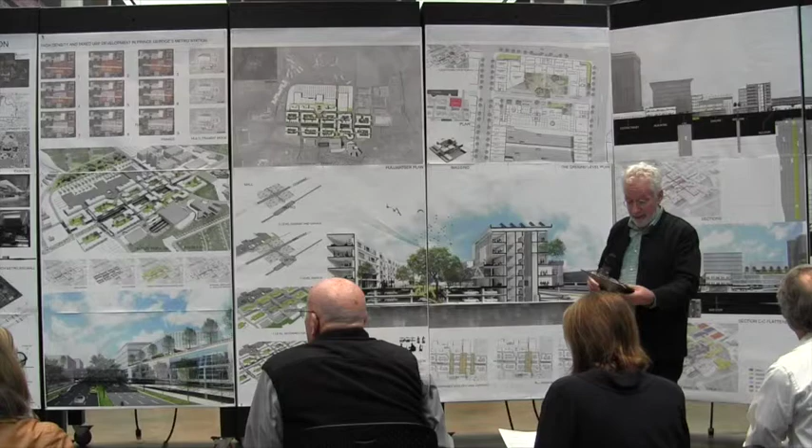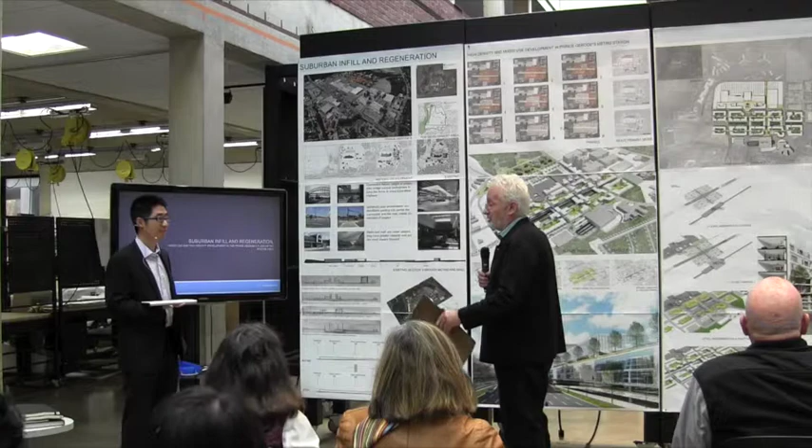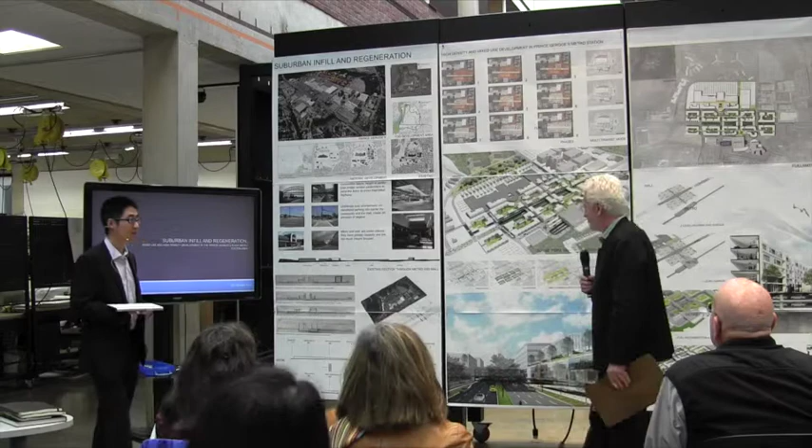Qiansen is a Chinese national who's joined us for the last several years, and I've had the pleasure of really having Qiansen as a student in the past, and he's actually assisted us in the office. He's got really a brilliant hand and mind, and he, however, chose a thesis subject which surprised me at first. You actually started in China.

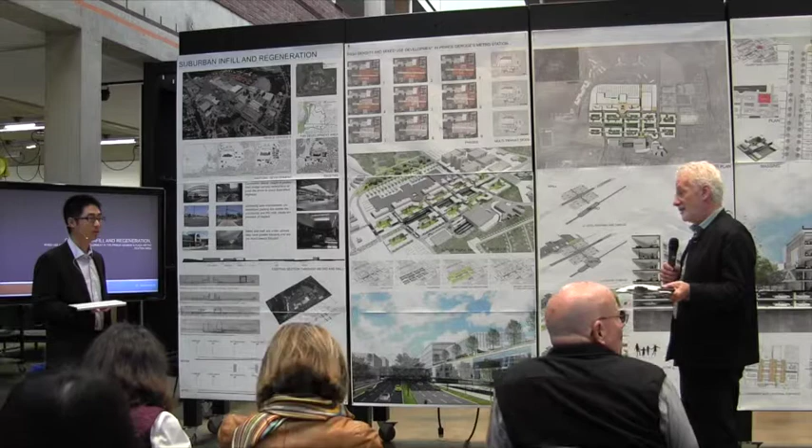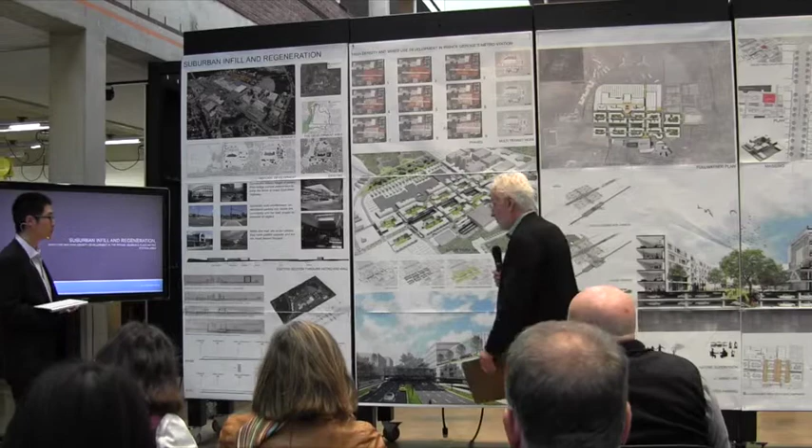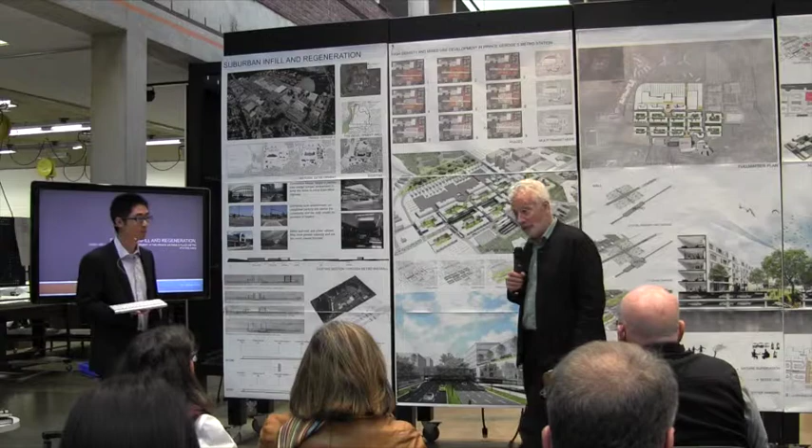Yes. And he was going to do work on second-tier cities, as I recall, to try to look at giving them more attention, more prominence, more appeal, etc. And instead shifted to an American context, especially suburban context, making a case to me, which was pretty fascinating, that China's rapid growth and transformation was probably going to be facing the same fate that American suburbs faced, which is somehow that rapid growth, perhaps not the deepest thought, maybe more impulse and space-expansive development.

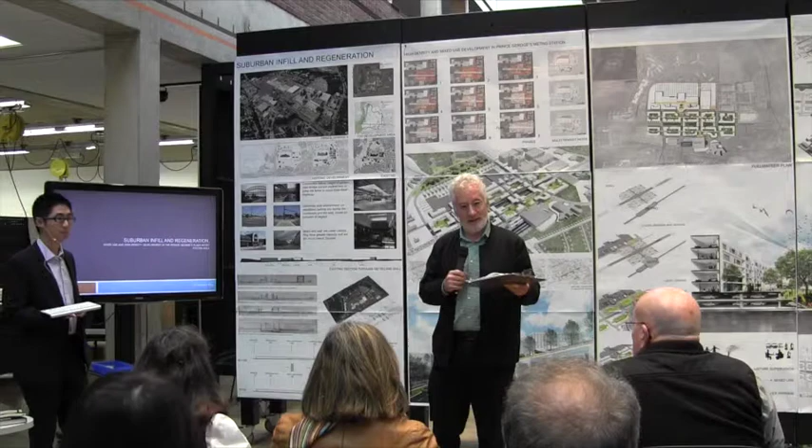And since American urbanism was looking at the suburban settings and thinking about them ahead of some of their Chinese brethren, he wanted to look at that and look at the transformation possible here in America as a way to set the stage for his thesis. So with that, Qiansen.

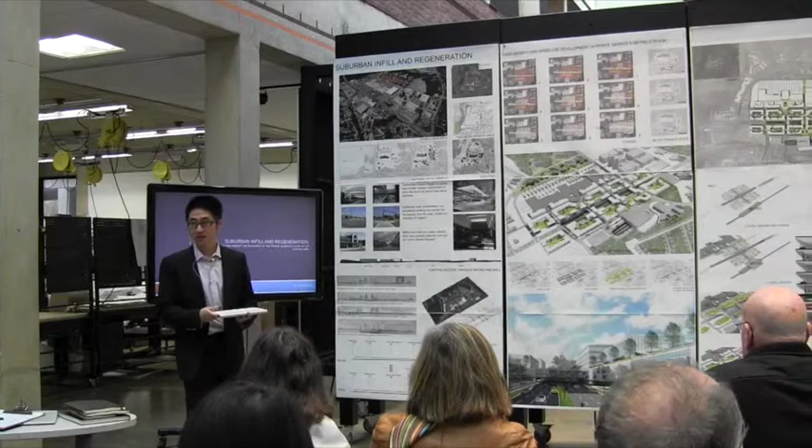My thesis title is Suburban Infill and Regeneration, High Density and Mixed-Use Development in Prince George's Metro Station area. So why am I doing this thesis? As Gus mentioned, the Chinese city is in rapid growth and expansion. So I think it's very important.

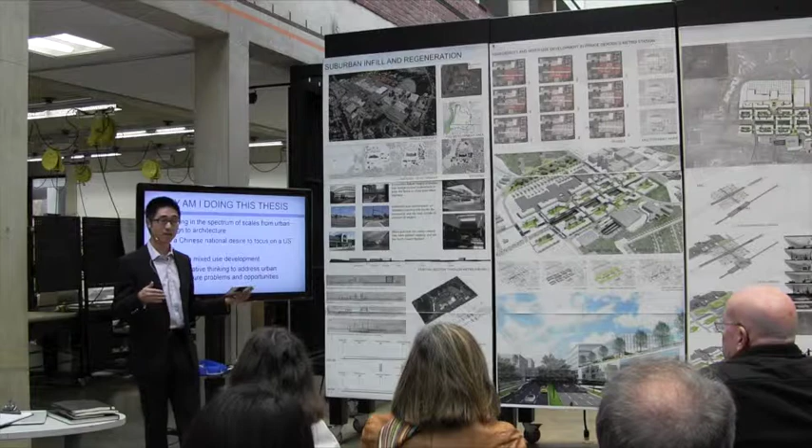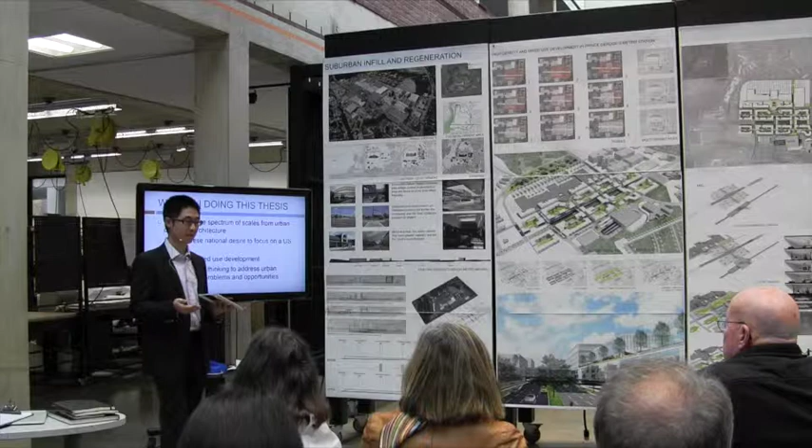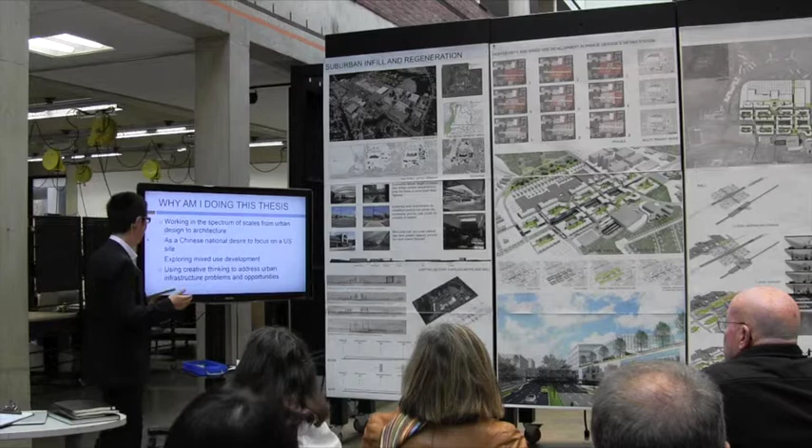It's very important for me to work in the spectrum of scales from the urban design scale to the architecture scale. And I plan my career as an architect in the United States, so I'm thinking that choosing a site locally might benefit myself. And I'm very interested in mixed-use development and how to use creative thinking to address urban infrastructure problems and opportunities.

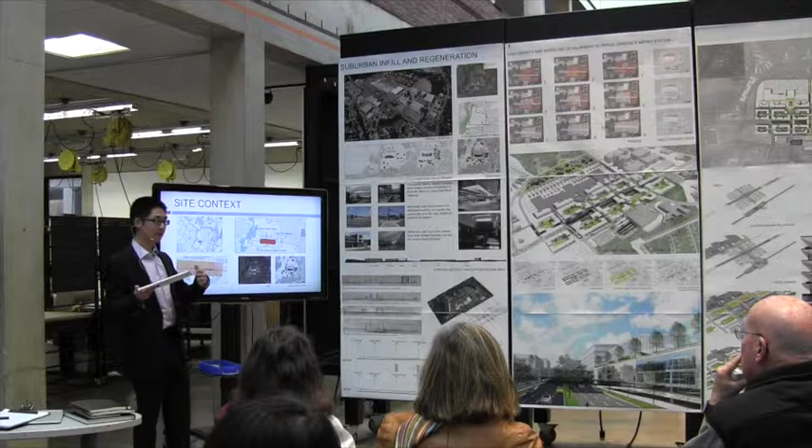So my site context. My site is located 3 miles away from the University of Maryland. It has shuttles connecting directly from the site to the campus, and a lot of bus routes going through my site, so it has potential for further development. And inside my site there are a lot of educational institution buildings: a high school, a community college, an elementary school. So it's very important to consider a safe environment for the pedestrian.

Talking about the pedestrian experience, the primary connection for the pedestrian from the mall to the metro station is a pedestrian bridge. This configuration diagram shows the suburban and urban configuration inside my site. So, potential for the new development.

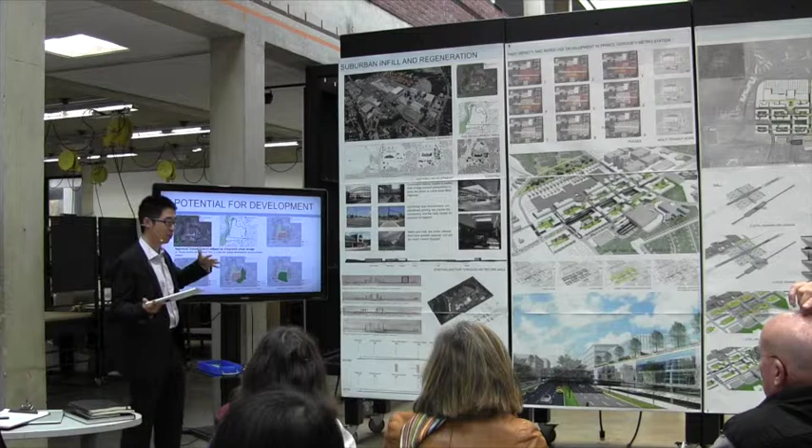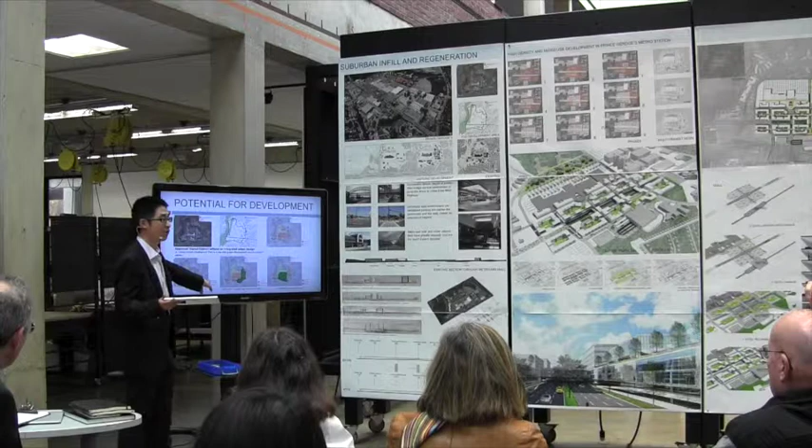The black boundaries show the transit-oriented development approved by the government, which is not an integrated urban plan design. You can see the red zone implies the suburban characters, and the green zone implies the more urban characters in progress. And this is the scope for my intervention. The reason is that I think it's appropriate to connect the existing mixed-use development of the University Town Center back to the metro station, and also connect the successful mall to the metro station.

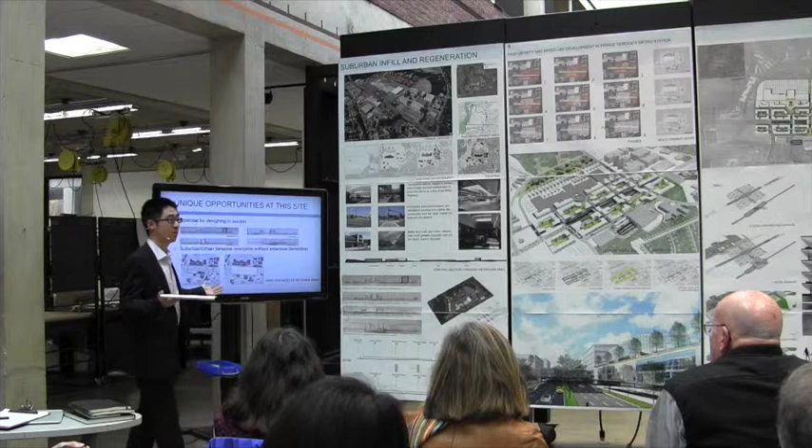And the unique opportunities inside my site. The first one is the potential for designing in section, because the East-West Highway works as a barrier, and pedestrians use the bridge for the overpass. So there are a lot more opportunities to further develop strategies in the section. And the suburban and urban tension I mentioned before can be overcome without extensive demolition. You can see for my scope of intervention, I only need to take 7 single-use buildings away for the new development.

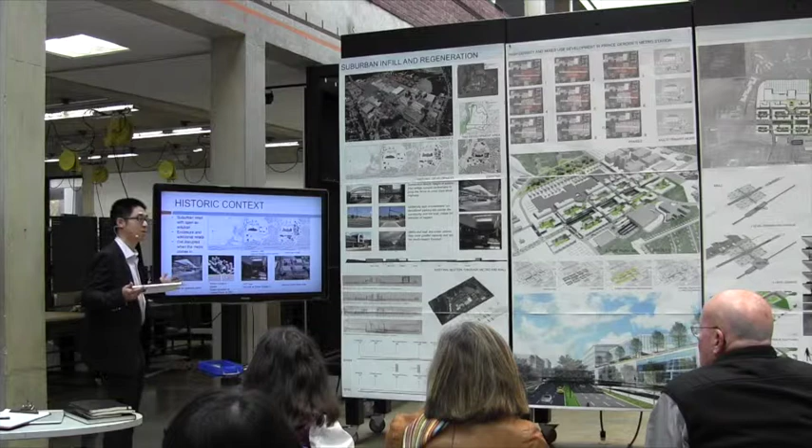Before I further share my design, I want to explain what happens here. The first thing is the figure-ground diagram showing the 1940s, 1980s, and now. The mall was there since 1959, and it used to be an open-air mall. Since additional retail came in, the mall became enclosed. Edward Stone proposed a vision for new urbanism using office buildings and high-rise towers here, but only building A and building B, known as Metro 1 and Metro 2, were built. And they use the rest of the space for parking. So when you look at this historical context, you can see this place has been struggling with the suburban and urban environment all the time.

So I will address 3 key issues in my site. The first one is connection failure, the pedestrian overpass. Some people even climb over the fence to cross the East-West Highway, and the government is trying to increase the height of the fence. It's very dangerous. And the pedestrian bridge is underutilized, uninviting, and in disrepair. I can smell somebody peeing inside that bridge. So it's very unpleasant.

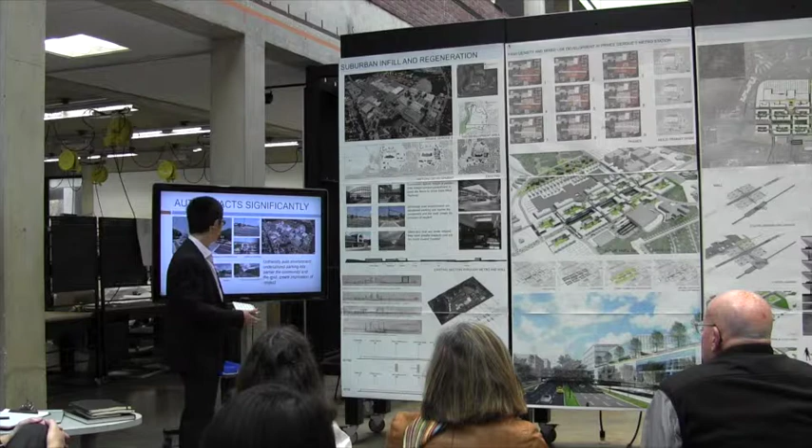It also impacts my site significantly. You can see the formless intersection, and it's very dangerous for people to cross. And underutilized parking space works as a barrier from the communities to the mall. And the big destination is too inward focused. You can see that the mall only serves inward, and the metro station is hiding behind the parking garage here. And this is the entrance for the metro station.

So I'm searching for mixed-use and high-density development to help me repair this fragmented context. So I start with how I can do some intervention with the mall, with the metro station, with the frontage of the East-West Highway with higher density, and something with the intersection and node strategies. So I did some precedent studies to give me more insight for my thesis.

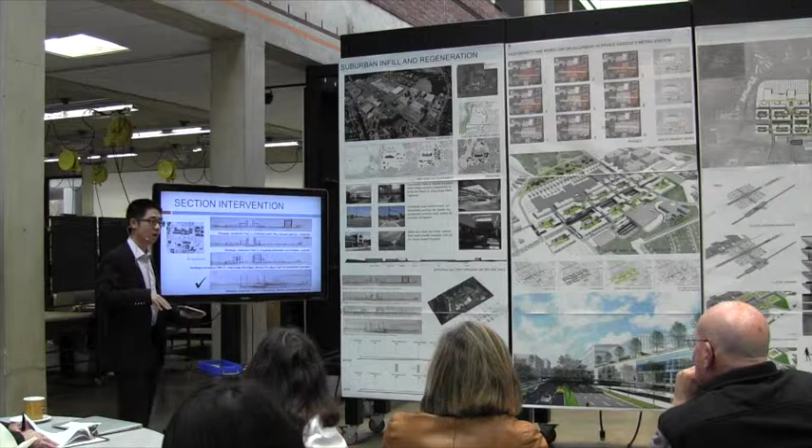For the section intervention, I propose 4 different kinds. The first one is to change one segment of the East-West Highway to a boulevard, compress the traffic, and make cars and pedestrians share this road. The second strategy is using a sunken plaza to make people go underneath the highway, which has proved ineffective because it's dark and people prefer grade level. The third one is to use bridge architecture to make better connections, incorporating the existing infrastructure. And the last one is depressing the highway and making the cars go underneath the pedestrian grade level.

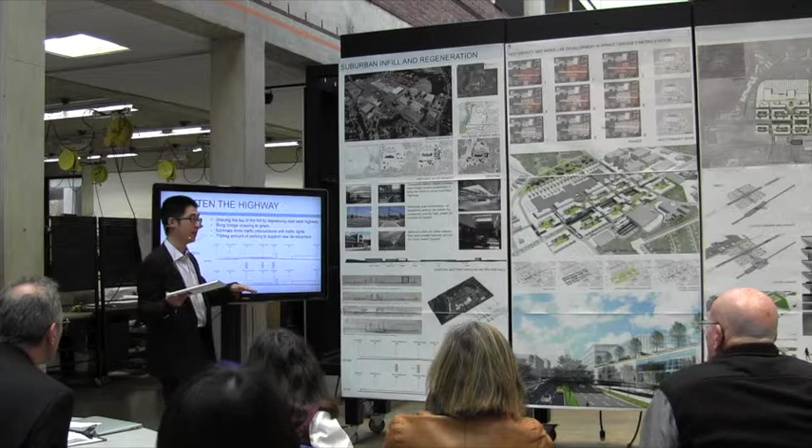The reason why I'm choosing the last one is that it gives much more freedom to pedestrians, and it will add value to the properties of the site. Another reason is the special topo conditions. This section shows the East-West Highway, and you can see that the pedestrian bridge is much higher than the rest of the road, about 40 feet higher than Adelphi Road. By depressing the highway, making it go underneath the pedestrian connections, you can make this road much flatter and give a better experience for the drivers.

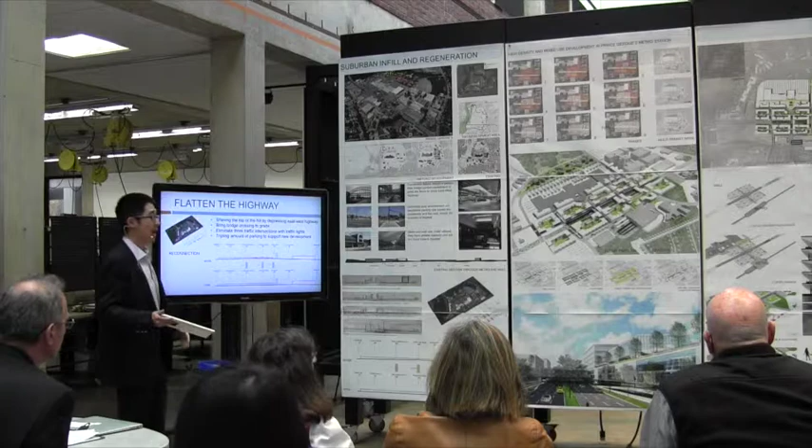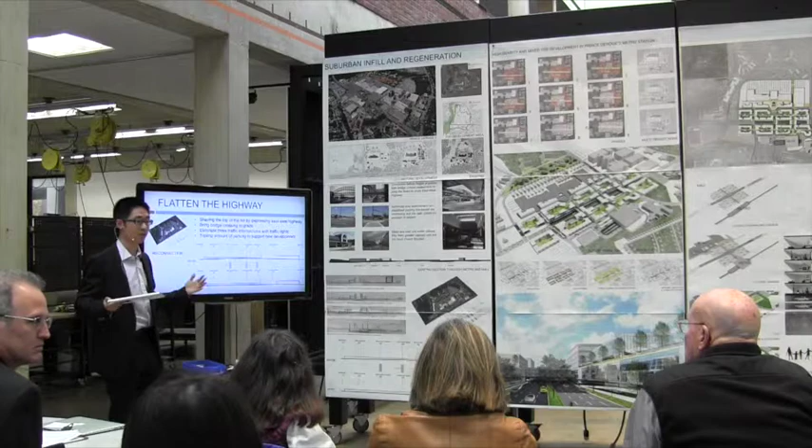And how I can make this happen? I have 4 steps. The first one will be shave the top of the hill by depressing the highway, and then I will drop the bridge down to the ground and eliminate the 3 intersections and make new connections. And since I dropped the highway 18 feet down to the ground, lower than the lower, I can have at least the opportunity to construct at least 2 levels of the parking ramp underneath it.

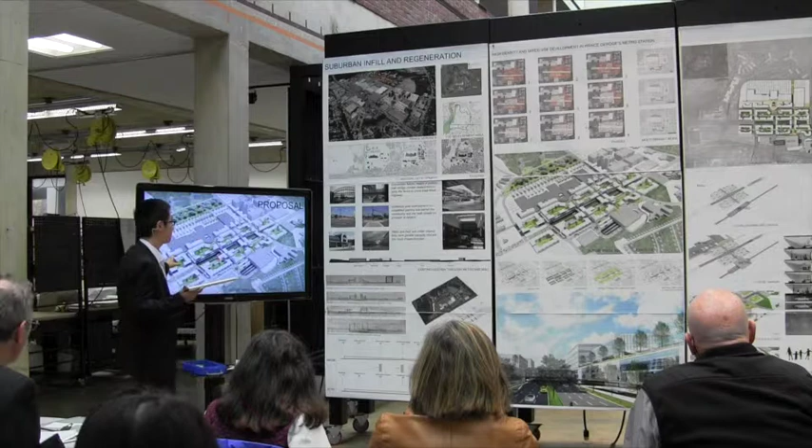So this is the existing condition. You can see the east-west highway, the pedestrian bridge, the metro station, the mall. And this is what my proposal looks like. So you can see depressing the highway remakes the new connection, gives the opportunities for much more freedom of the pedestrian. And by using these courtyard types of plots, creating some more private space.

And you can see these new connections. The middle one will be much more friendly, but also can be shared with some bus and bike lanes. And these 2 new connections could be a little bit of car and pedestrian sharing. And this new development also can give opportunities for further development of this mall here.

So these are 4 big principles in my urban design. The first one is the transformation of the infrastructure, the circulation diagram. The second one is courtyards, courtyards with green vegetation and playground. And the third one is a street connected architecture. So it means that wherever you construct your buildings here, you can have multiple exits for different transit modes. And natural ventilated landscape parking. So I'm going to go into detail to tell how this is going to happen.

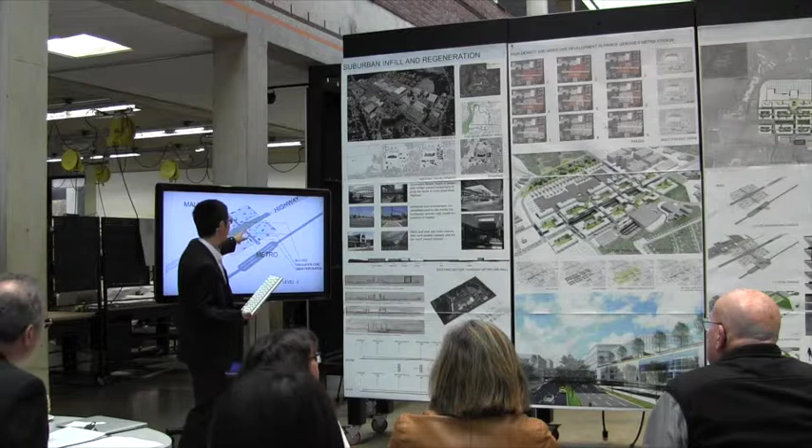So since the highway is depressed and is connected directly back to the minus 2 levels of parking ramps, with the bus stops and the circulation cores to bring people going upstairs, and with the green perforations coming here. And the minus 1 level. And at the ground level, you can see the new connections with mixed use, with office buildings facing the noisy highway, with the pubs, the restaurants, with cafes wrapping the new bridge to prevent the pedestrian being exposed to the highway. And this is a mapping diagram to show that.

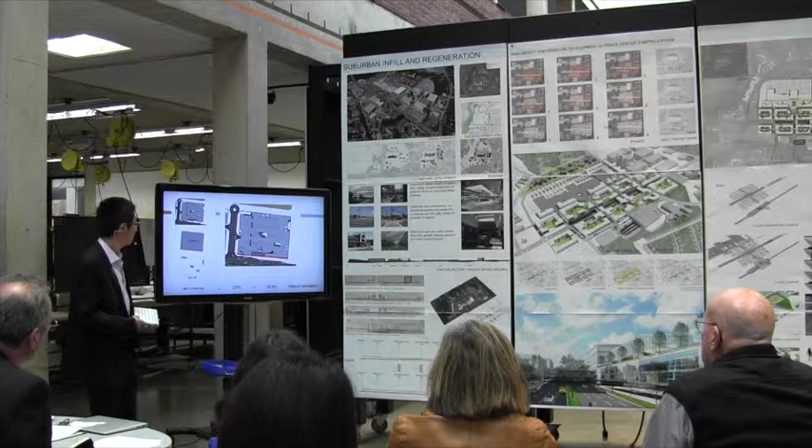Sorry, just, are these new buildings? Yes, these are new buildings. So they're inserted within the mall? Yes, they are upstairs. They're on the edge of the mall. But you're changing the mall, or tearing it down and adding them? A little bit of both. Okay, got it.

So I did some calculation to prove that my parking ramp is effective. By doing this green perforation, it gives me at least 6% of the natural ventilation, and plus this side of the parking ramp opens totally up to the east-west highway. So it gives me at least 25% of the natural ventilation. So in total, I can get at least 30% of the natural ventilation, which will make this parking ramp very inexpensive and effective.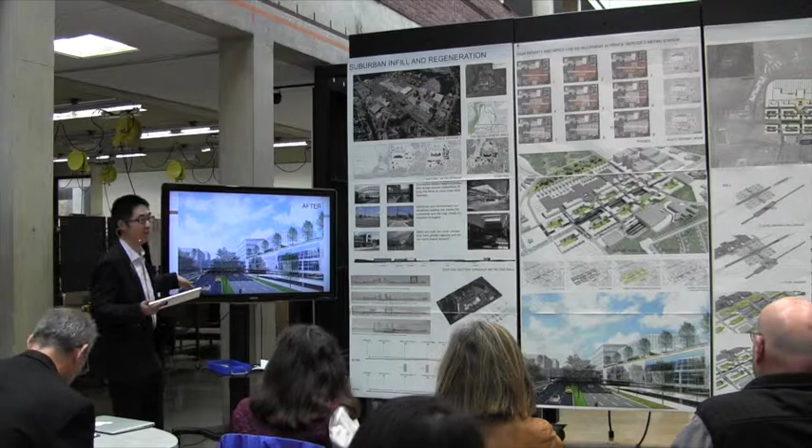So this is the existing condition of the east-west highway and the fence, the overpass, and you can see the gas station placed here, and a lot of cars and pedestrians going here. This diagram is my proposal. You can tell from this image that the depressed highway is not offensive like a tunnel, but it has plenty of vegetation and daylight and natural ventilation and multiple transit modes going on here, with bus stops, with a new bridge working as a shelter for the people waiting for their bus.

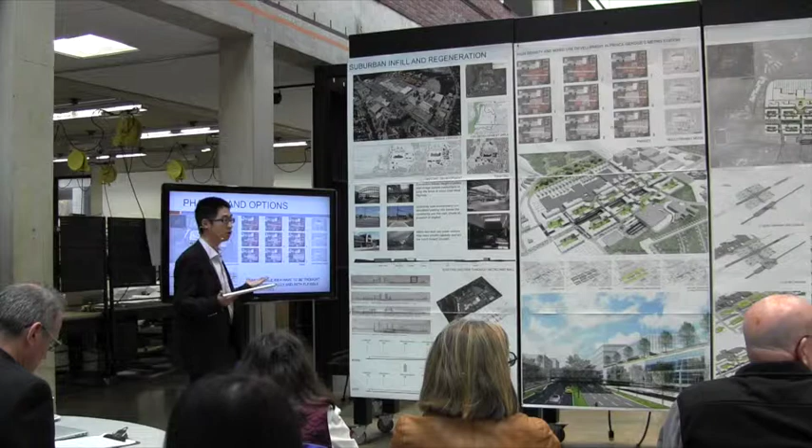So urban design ideas need to be developed incrementally with flexible alternatives. So I'm thinking of my development as phases. The first and second phases will be the infrastructure transformation, and in the third one I'm starting to program my architecture, the courtyards, with at least 500 parking spaces serving the upstairs programs inside a 120,000 square foot development.

And this is a diagram to show the mixed use inside my area. So you can see this is before. This new development creates some kind of residential communities, with the office buildings facing the highway and the residential buildings held back because it's more private, and some retail, pubs and daycares, the mixed use programs working as connection programs going from the metro station to the mall.

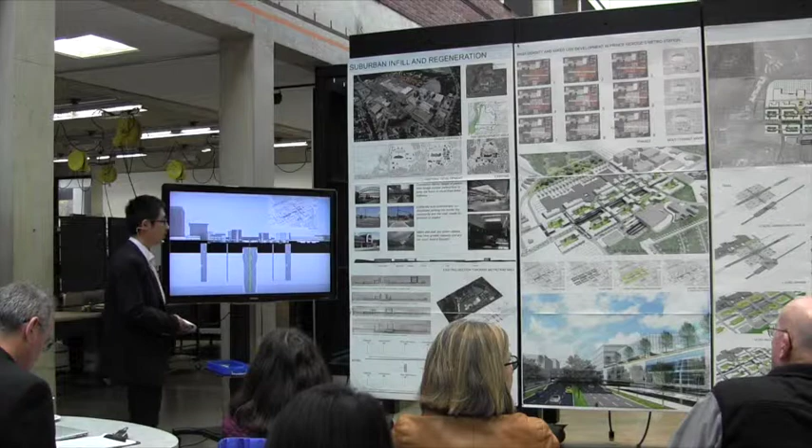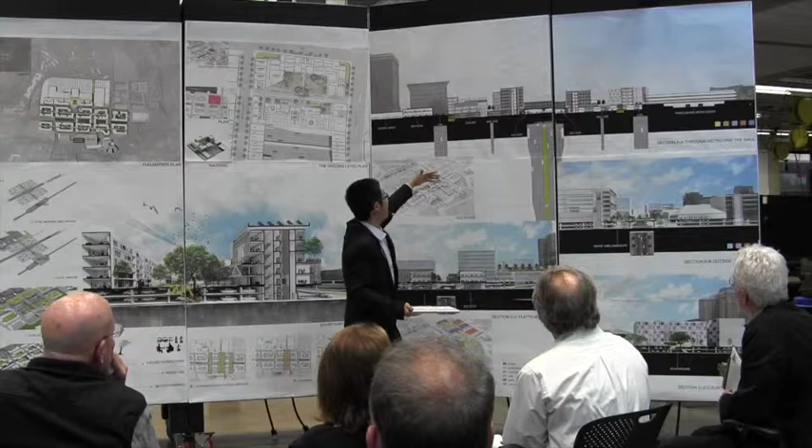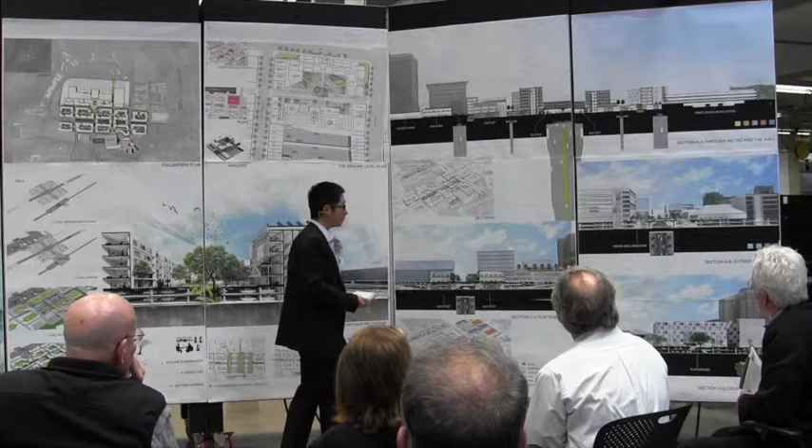So I'm going to bring you guys through my board. So this big section shows that the primary pedestrian activities happen at the ground level. You can see from the metro station and the courtyard and some cafe and office building and the daycare center, and it gives opportunities for bike lanes and cars, and also gives opportunities for the new retails for the mall.

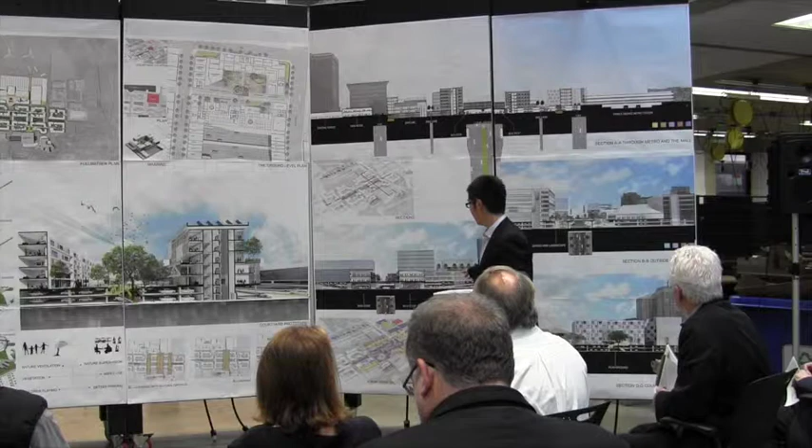And we're stepping outside the metro station. What you face is, instead of the dark tunnel, a pedestrian plaza with all the retails, with a gym, with a cafe, and you can pick up your cars going underground. And when you're going a little bit forward, you can see this depressed highway and the bus stop and the restaurant and the Target in front, and also the green roof.

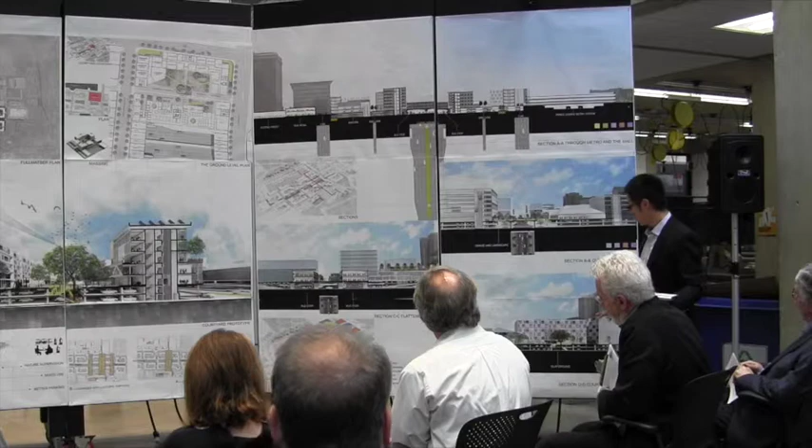And then we go to the courtyard experience. You experience a private environment with a daycare center where parents can drop their kids, and they can go shopping either this way and go to work either this way, with a playground with green recreation here.

So this is the architecture scale of my thesis. The big idea is that my architecture serves people both inward and outward. So the programs of the bike shop and retail serve outward, and the gym and cafe serve inward, with the bike storage and bike lanes with a children's playground and green recreation.

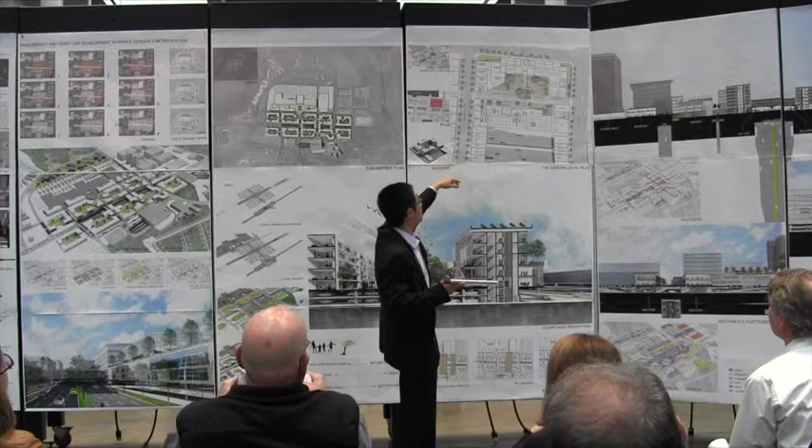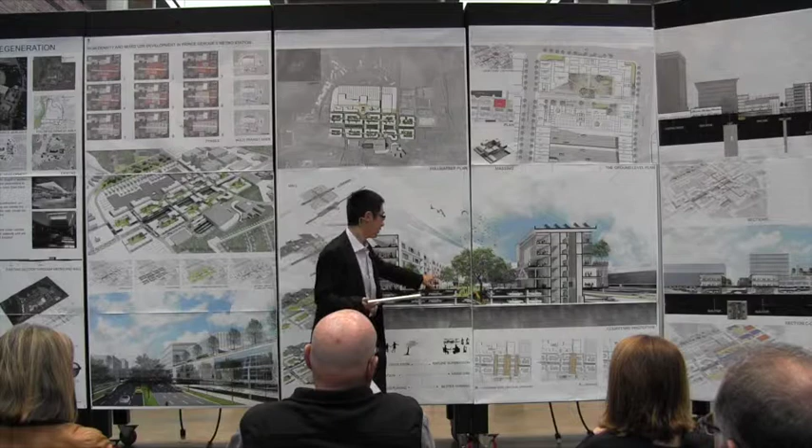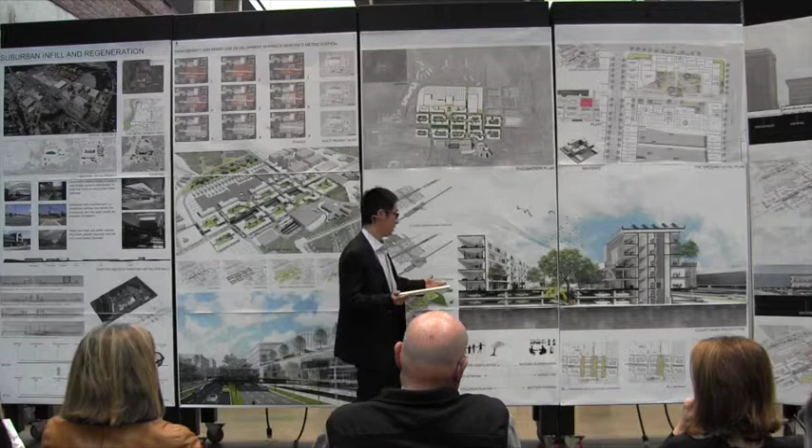So this is an experience that you can have inside my courtyard. One of the unusual ideas of my urban design is preparing the below-grade parking ramps using a series of landscapes for children's recreation activities. You can see my ground is 2 levels above the highway, and unlike other city parking ramps, my ramps give people better natural ventilation, air, and sunlight, and a lot more activities inside my site.

Usually the parking ramp is the worst experience in a project, but in my project it could be the most pleasant experience on the whole site. So that's all about my thesis.

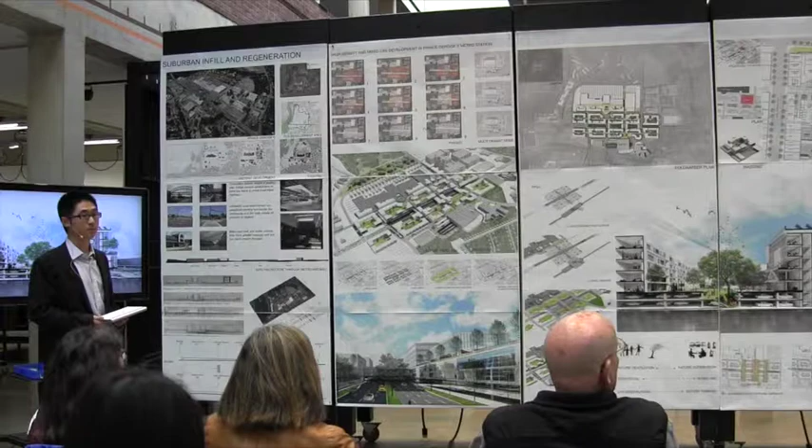Question. You haven't changed the level of Belcrest Road, right? No, Belcrest Road stays where it is. Right? Just point to Belcrest Road so everybody knows what I'm talking about. Yeah, it's that road, which is the main spine through there. And the reason you have 2 bridges is because on the left side of the plan, you didn't bridge that because you have to bring the highway back up to grade there?

No, that's not the reason. The reason is that I'm giving the options that you can wrap it, or you can leave it open. This perspective view is only one option; if you find this successful, you can wrap it here. So the ramping starts east of Belcrest Road, right? Yeah. And then goes under Belcrest and stays down all the way to here, and it meets grade there, right? Yeah. Okay, that's all I wanted to make.

So I'll start with just a response. It's an incredibly ambitious project that tries to solve many problems, right? You have traffic problems, environmental problems, economic problems, quality of space and quality of life problems, and you're trying to address all of them in a place that's been rather poorly loved for the last 50 years as the result of not very thoughtful investments. What is the most important thing to you? What would be the criteria for success? What are you trying to do with this intervention, first and foremost?

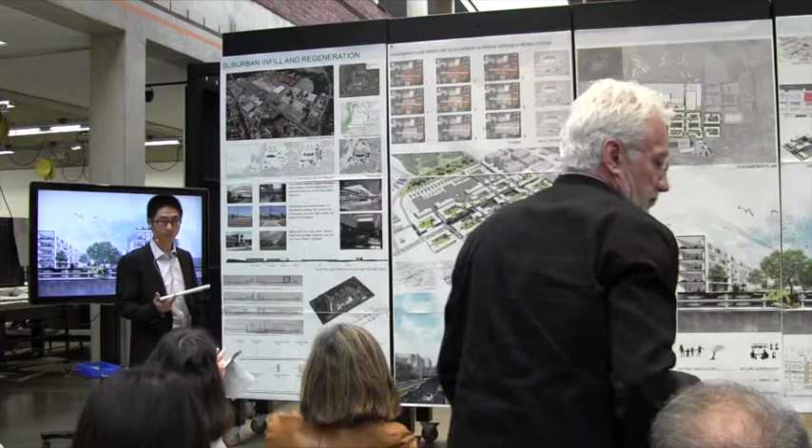And it's also the connection to the metro, right? Yeah. I mean, this metro is this underutilized asset in the community, and by creating all this development on this side of the highway, well, not quite exponentially, but you're dramatically increasing the opportunity for people to live here, to work here, and then connect to all the other places that they can connect to by metro.

You're creating a sense of place here. There is no there right now. Right? Well, there's a start. University Town Center is a really good start, but you're trying to increase that dramatically. I think it is a heck of a problem to take on in terms of scale, and I want to tag on and commend you for that.

I have a couple of questions. How many residential units are you adding in this? You know, how many apartments or condos, how many people could live here in addition to work here and shop here? Hundreds, or did you quantify it? I'm sorry, I didn't quantify that.

Okay. Because I think that's key to bringing this to life, obviously, and I was just looking at how you distributed your residential components. I think you've done a good job of balancing the residential alongside the office and the retail. What were your thoughts about, is this happening all at one time? Is this happening in phases?

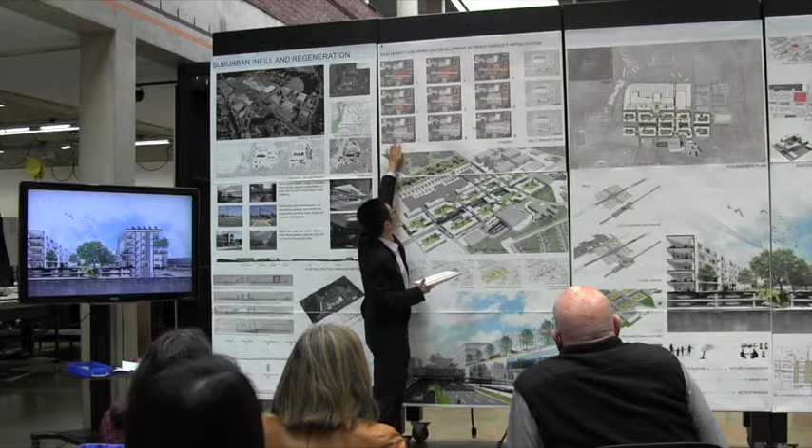It's happening in phases, as I mentioned before. So this is a sequence of my phases. The first phase will be the corner, because the corner usually has the highest value. And then the second phase will be happening in front of the mall. After these two happen, you can either demolish the stuff in front of the metro station, or go that way to redevelop that single-use development building. And each phase the program has 120,000 square feet, with 500 parking spaces to serve it.

Yeah. I want to just echo what has been said, that this is a very ambitious undertaking. A couple of observations about what's going on right now. There are a number of places throughout the United States, and certainly several in Washington, where the communities are doing makeovers of existing locations of infrastructure. This makes me think about what's happening in Tysons in Virginia. I don't know if you know about that. A place that was conceived in the 1960s that's totally automobile dependent, and they're talking about a retrofit that will take 20 or 30 years and require essentially creating a whole new pattern of streets and blocks.

Capitol Crossing over the 395 depressed segment of highway in Washington. I don't know if you know about that. They're going to deck it over and build new things. I think what you've done is an exploration that speaks to a lot of what's happening in reality, not just here and perhaps eventually in China. Although I was just recently in China, and they're operating at a different scale. I was in Shanghai. They're building 7 subway lines all at once.

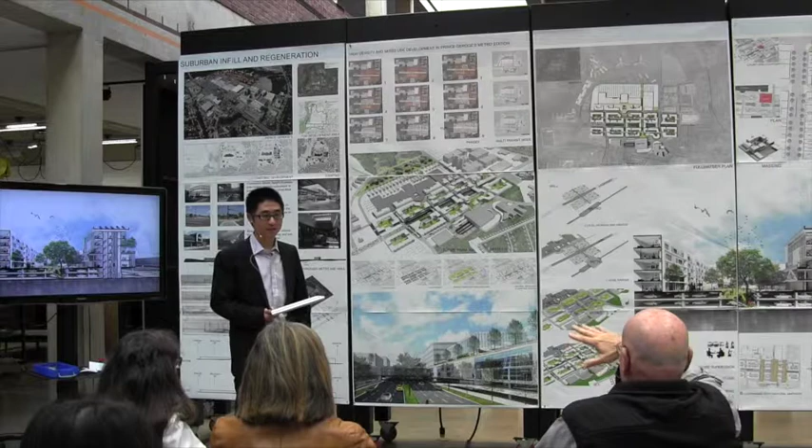Big buildings out there, I mean, there's... Oh, yeah, no, I know. I'm just curious. It's really not a criticism, I think it's a question that this poses, which is, should the density at the east end and the west end be, as you show, the same? Should it be higher at one end than the other?

What should the components... Should the building blocks be similar thicknesses also? Your building blocks are almost 60 feet. Yeah, but they're similar thicknesses. And I can imagine that's for perhaps daylighting and solar strategies and things like that. But some of those thicknesses might actually vary depending on the use inside of it. Residential might be different than office, and it might be different again than a retail component.

In your new construction, can an anchor store come in? I know there's anchor stores already at the mall, but if a new retail establishment wanted to come in and be in the newer part of the development, I'm not seeing a place for that really to be absorbed. But I think these are good problems to have. It's exciting, and the blocks are similar in scale. I mean, I'm surprised to see there's not a little variety.

At one level, it's a bit of an updating of a similar strategy for Grand Central, which is you put the transit at a lower level and you build a deck over top of it, right? And that's what they did at Grand Central to make all the real estate value at Park Avenue, all those areas north of Grand Central.

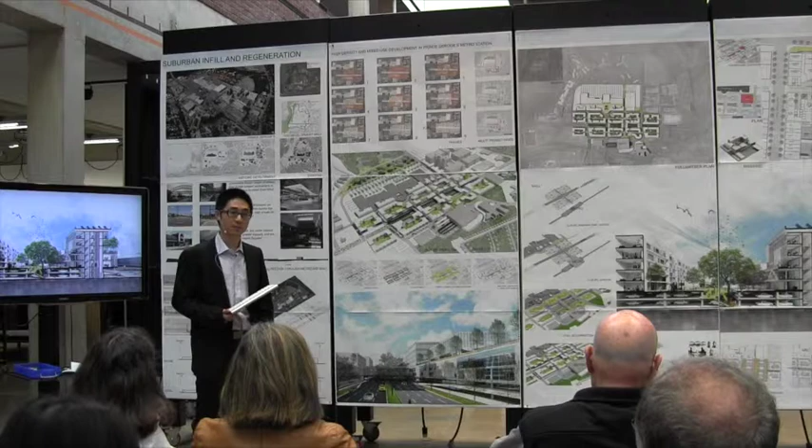I guess a couple of questions come to my mind about that in terms of your strategy, which is, if you have to accept the premise that East-West Highway in this location is never going to be a pedestrian street. And the current master plan for that area calls for trying to transform it into a pedestrian street. And you've taken the opposite point of view, which is to deck over and to say it's going to be a kind of throughway and not a surface street that really could be inhabited. And I think that's an okay proposition to take.

I think the thing I would be looking for more in the research is, were you to try to make it a pedestrian street, did you look at what you would have to do to it? For example, is there 40,000 cars a day or 50 or 60? And at what point does that become untenable? Because traffic engineers will tell you above 40, it's really hard to have a pedestrian environment, even though there are boulevards in Paris and Connecticut Avenue in DC that carry that much traffic. So would you have to widen it and have a kind of frontage road or something?

One other point I want to make is that I think the strategy seems fine. I would be looking as well for places where other amenities might occur, like schools, so you could have a complete community, more of a connection to the retail center that doesn't really work right now, the one they built recently where the supermarket is. And then probably even building over the metro itself, so you could get more density, because there's no real reason why you couldn't build over that as well. Yes, exactly.

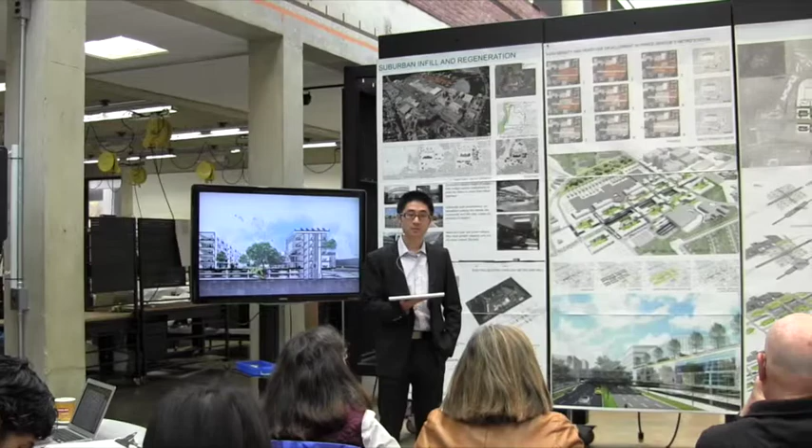Yeah, you can have more of a green plaza over the car area. But I think that's the dilemma of this thesis, which is by making this grid network a couple levels above East-West Highway, you're basically turning East-West Highway into kind of a through thing. I think it's very difficult for it to have a successful pedestrian environment.

And I would almost think you'd go in the opposite direction, which would be to say, hey, screw it, we're going to put this deck over the top of this. It's going to be very different with very high density. Outside of Stockholm, yeah, it's a tunnel with a much larger deck, and you put 10-, 20-story buildings on top of it. Or even park space at the level he's putting it. I think we're both arguing for the same thing, more deck and less just little bridges going across.

Is there a response to some of these points? No, I'm just learning, listening. I just want to be sure. It's been a while since we heard from you.

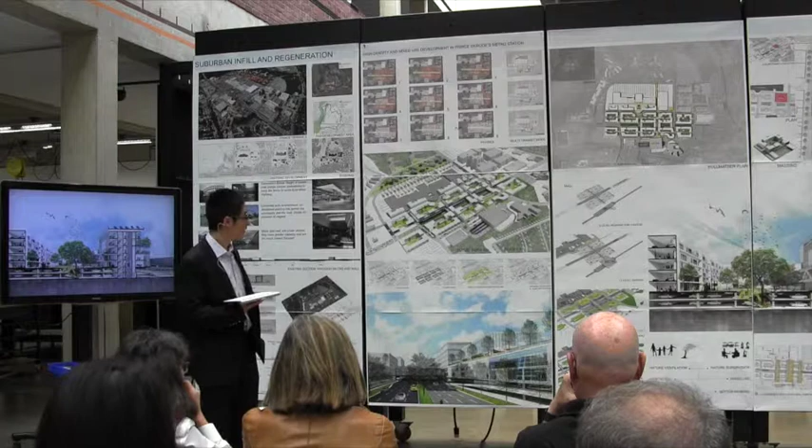I just wanted to add one other item to the discussion. I think that you have worked very hard to create a very strongly connected environment between the metro and the mall. And we've heard a lot of controversy about whether this street itself should become the level for connection.

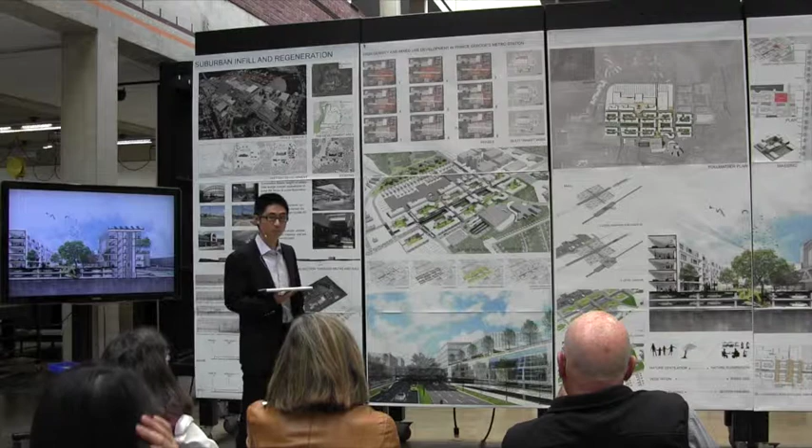But I'm looking to the north now, where there's quite a bit of housing, and there's Northwestern High School, and there's some community buildings like the library and community center and a bunch of churches. So there's a fairly significant flow of people coming from the north who would like to get to the mall. And I'm just thinking that there might be some low-hanging fruit here, because the street that's going through, I think it's Toledo, is not all that highly trafficked, and then there's the loop that's going around the parking lot of the mall.

And since you did such a very good job of adding some architecture to the front of the mall to rationalize that and make it more pedestrian friendly, I'm just wondering if you didn't think a little bit about how you might do something similar to the north and to the west of the mall to depress that parking and to increase pedestrian connectivity to the housing developments to the north and the west and all of these other community buildings.

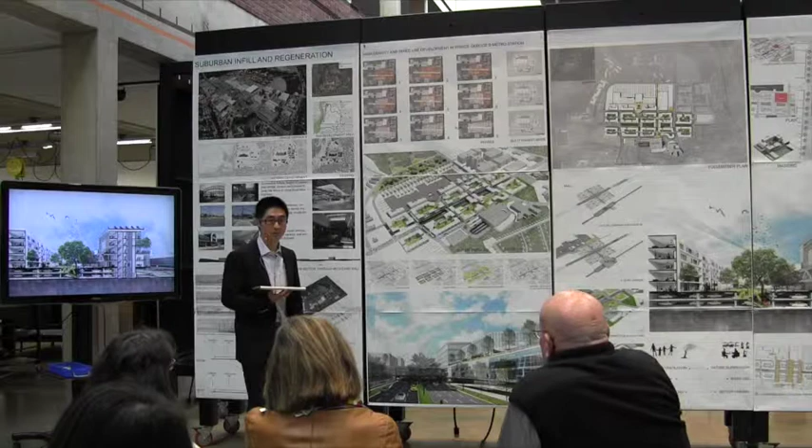So I'm wondering, did you at some point in your thinking consider the mall as a kind of 360-degree experience? I know that's asking a lot. It might be asking for another semester. Yeah, that's the future phase, I think. Can I just talk a little bit about... Of course.

The overall strategy, and what I appreciate is the seriousness with which you engage the problem to really try to solve the problem. But I would ask you to consider, especially given where you're going in your career, to maybe step back a little bit and think bigger, think more visionary, perhaps more conceptually in terms of what is the bigger problem here, or what is the bigger agenda that you might bring as a designer to this incredibly complex context.

On one hand, I think you've done an excellent job. You've taken care of the road, you've taken care of the parking, you've made a series of beautiful gardens, you've created block typologies which can then be rented out and populated with all these black figures on every floor. And so I think you've urbanized this area completely. You've created a density there that is an expansion of an urban context.

I'm a little bit confused as to where the block typology originates, why it's appropriate in this context. I didn't hear you discuss perhaps the surrounding context or other forms of urbanization that might have informed this. Savannah, Georgia is one that comes to mind immediately, a kind of block infrastructure.

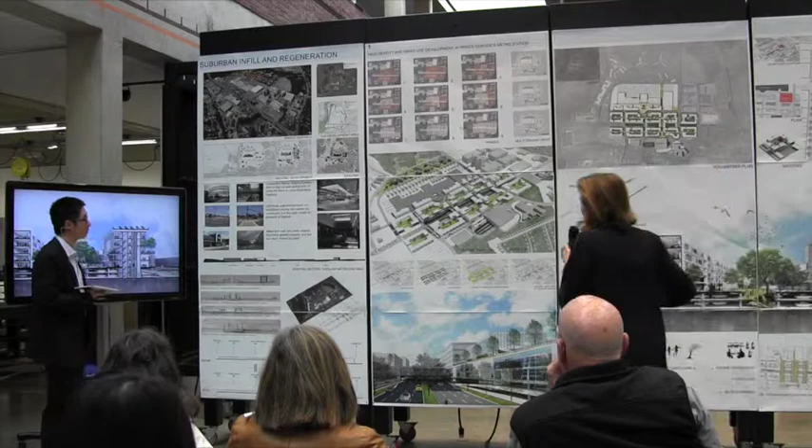And I think there's something very unique about this site in the sense that it is at the edge, again, not knowing the area at all, but that must be a larger, that's the biggest plan I have, is at the edge of a much larger watershed, right? So I guess my question, and I look at the site and I wonder,

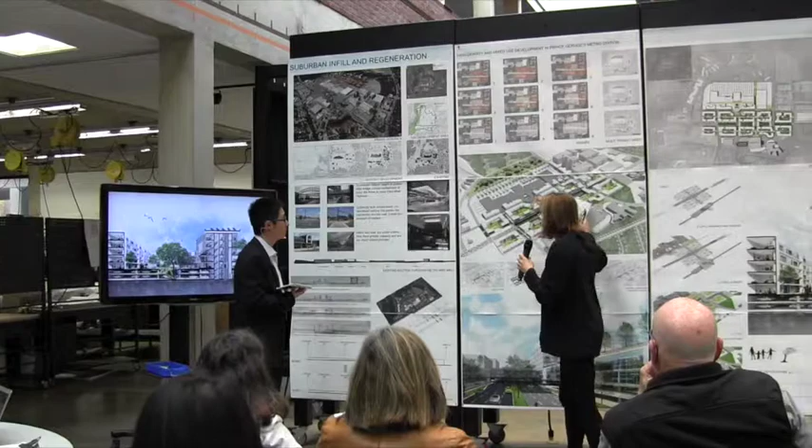rather than going in with a kind of major developer mentality where let me design everything, let me turn this into a kind of urban, a fragment of a city or some kind of urban condition, why not go through and look at the context of that site and its history, that it's somewhere in between. It's suburban, urban, rural. I mean, once you sink the road, you might as well cover it all over.

I guess that's my initial reaction is, okay, you put all this money into sinking the road, why are we still seeing the cars? Right? So once you do that, you can say, well, okay, I've spent all this money, now I have this incredible empty site with a series of really strange buildings all over the place, in kind of ragged edges, internally related, completely have no exteriority. So what is that context?

So an alternative strategy might be to go in more like a surgeon and begin to locate certain primary infrastructures, absolutely, but perhaps not with such a kind of totalitarian segregation of program, because the one iconic example that I think every student knows inside out at this point, which really doesn't work, but it set an interesting precedent, is the parking garage of Herzog de Meuron in Miami, right,

where suddenly programs aren't layer 1, layer 2, layer 3, layer 4, but actually are much more blurred and integrated. But I think in the end, your agenda is to create a life here, right? Yes. You're trying to create a cultural environment. And I'm not convinced that the corporate nature of the personification of the architecture is going to create that environment that you're looking for, with a predetermined planning of these squares and blocks and office types and dimensions of buildings.

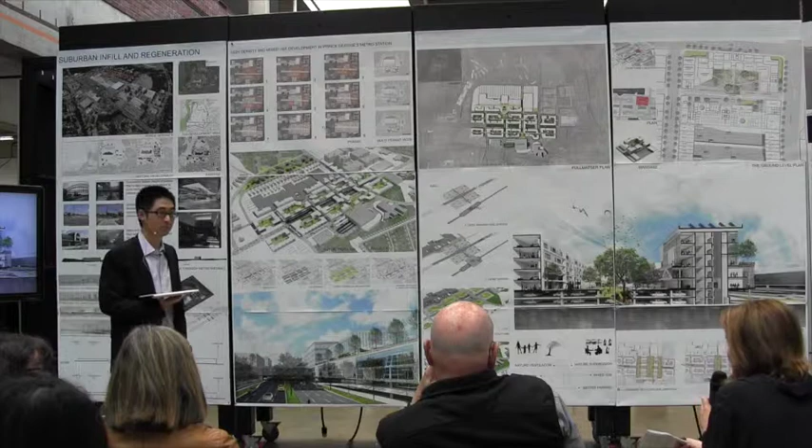It's already been talked about, right? So when you said the most important thing was to sink the highway, I think that your most important sensibility was to create a series of parks. And if that became the driving force, what is the infrastructure that you have to bring? Maybe the parks aren't only at one level. Maybe they go all the way up inside the buildings. Maybe it's a series of towers.

I appreciate the development of the section. I think that's your strongest initiative. But if you look at Hugh Ferriss's drawings of New York City, clearly the section calls into question, where is ground? We no longer know where ground is. So, again, I want to compliment you on the thoroughness and the professionalism with which you embarked and completed the project. I would just say, if you're going back to China and you're going to change the world, maybe think about some of the bigger agendas that you might bring to that condition.

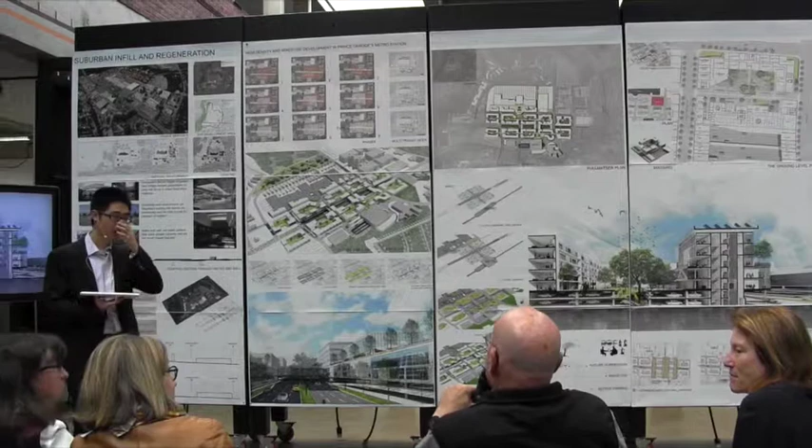Yes. Let me just mention one other project you might want to take a look at. There's a plan that's been approved by Howard County for the makeover of downtown, in quotes, Columbia, Maryland, where there's a shopping mall. And this is really picking up on your point about the mall in the area to the north. If you look at the plan, they've essentially taken a site which is mainly a giant parking lot with a very large regional shopping mall, built by Rouse back in the 60s. And this plan actually calls for eventually chopping up the mall and eliminating a lot of it.

And I think this is in a way extending your idea, and what you've heard from our colleagues, which is that this looks like it might really be just phase 1 of a 3 or 4 phase exploration, because I completely agree. I think the mall itself, I've been there, I can't stand the place. I just can't wait to get out. I think you should have performed surgery on that.

Take a look. Yeah, exactly. What they did in Columbia, as in Tysons, is they have overlaid a new framework plan, which is mainly about circulation, about blocks and roads and open space, and then they went from there. Over here. Yeah.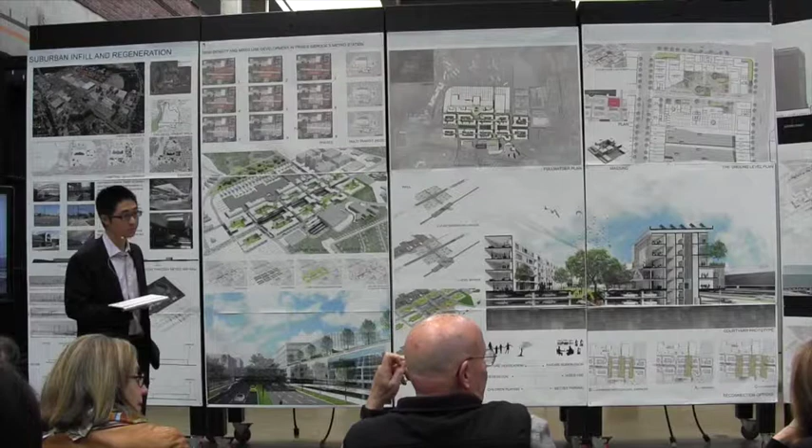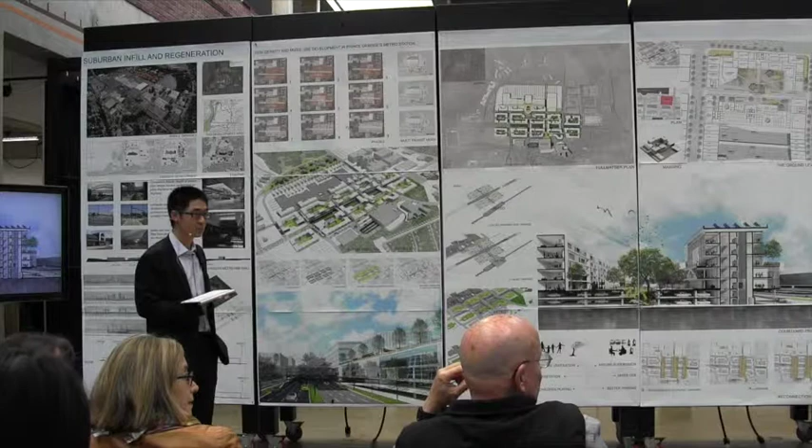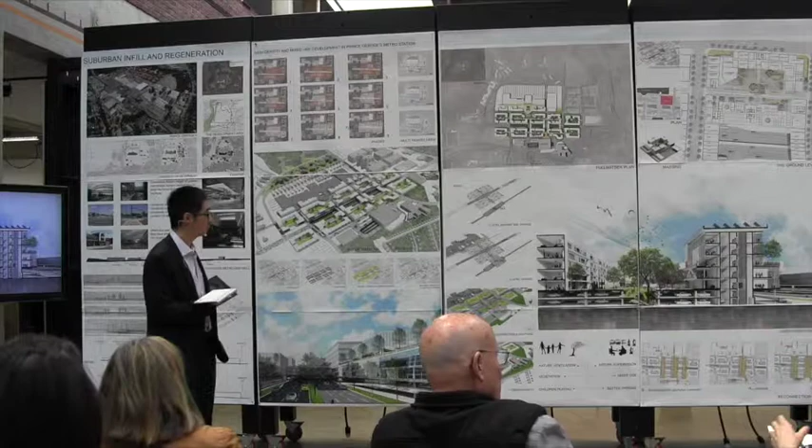The one thing that I wanted to add, both from a practical and an ecological point of view. On the one hand, we look at the mall, and I think you set yourself too many boundaries in your exploration. Okay. In that the cost of burying the highway is much greater, both in financial terms and in environmental terms, than the retained value of the shopping mall that you've chosen to preserve, which is sort of what forced you to keep the road where it is and build it downstairs. And I think that given the ambition of the overall plan, you'd have been much better off to sort of wipe the slate and start over.

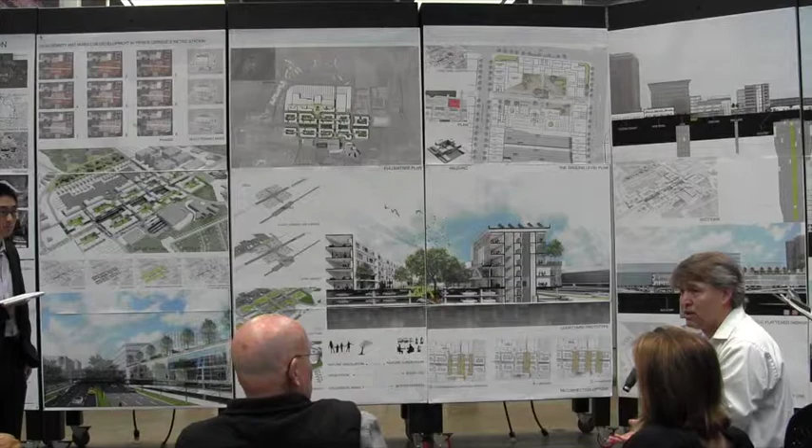And the one thing that you might have tried to do as an alternative, because I agree that the East-West Highway is really a highway and there's too many cars to deal with it at grade, but you could have split it up. You could have made separate parallel things that went apart and came back together, so you'd be dealing with half the volume of traffic and trying to accommodate it in an urban grid situation as part of a larger redevelopment plan. That'd be one of the strategies.

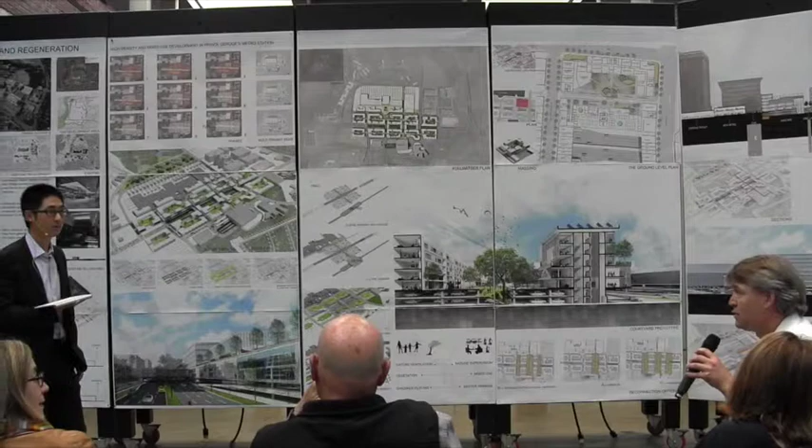But when you go forward in life, you're going to have a property developer beside you that is going to say, no, we will not bury the road. We'll actually tear down the shopping center, because the shopping center doesn't have any value anymore, having already been rebuilt 3 times since the 1940s when it was first created. And you'd be better off to just start off without it, I think. Yes.

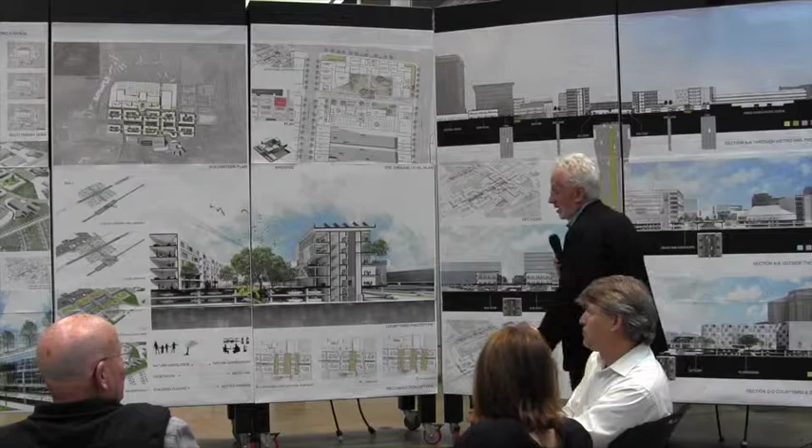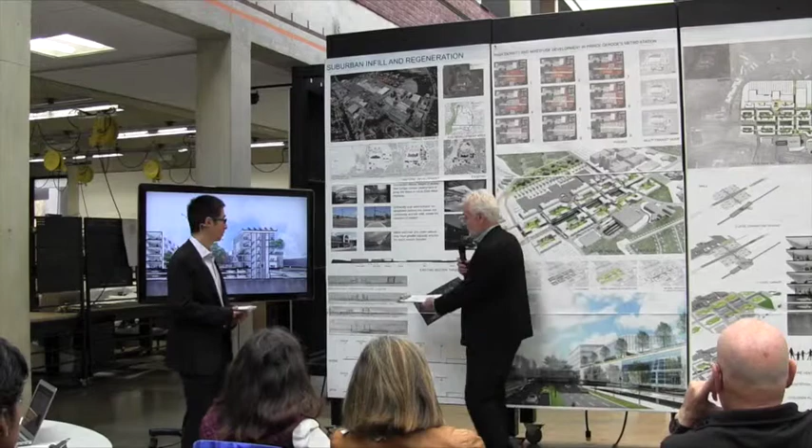Qiansen, we're going to bring this to a wrap, but I want to just say this has really been a great discussion, and one of the things that we're not able to benefit from because of the limited real estate of the presentation venue is how incredibly rich your process has been through the semester, and how many of these suggestions have actually been considered and rejected systematically. This is just a fragment of the alternatives. The idea of rejection here was nothing about truth or lack thereof. It had to do with managing scope and getting it done.

So this is one of the things that I've really always enjoyed about Qiansen: first, he works tirelessly. Now this is not against anyone else in the thesis studio, but I could come here almost any hour and he's working away at his desk. But not just spinning his wheels, he's producing an incredible volume of work and deliberating and discussing and worrying and going back and forth.

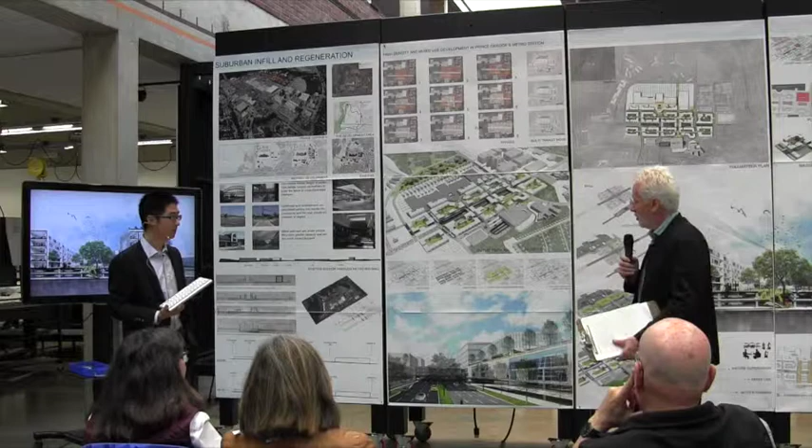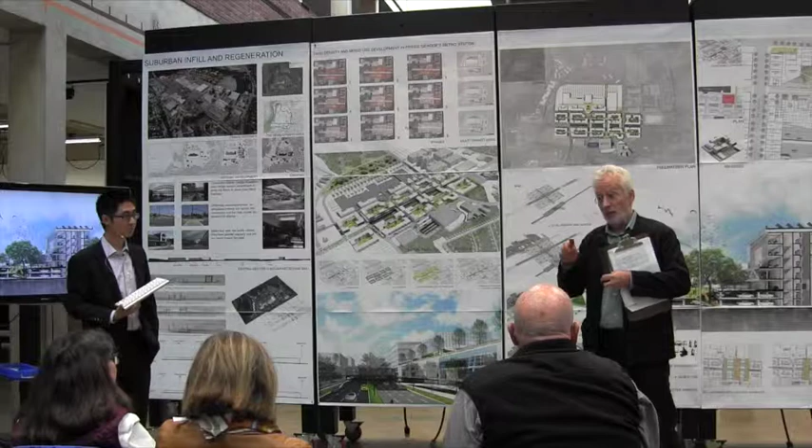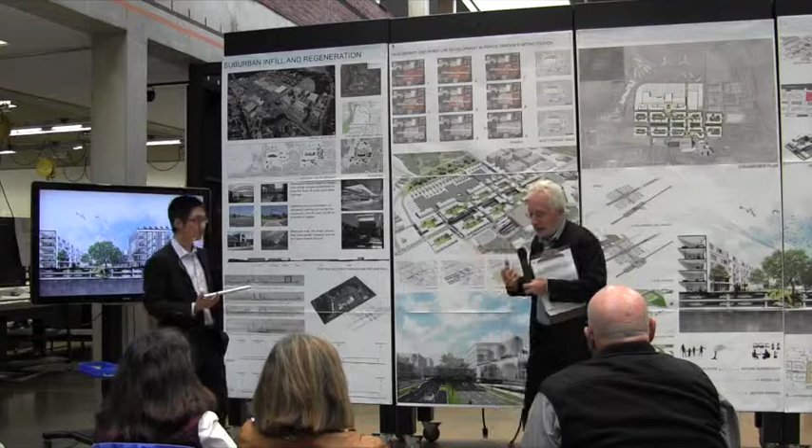He's done numbers of studies of maximum housing, maximum office, various mixtures. The idea here was to set a table that worked on supporting interconnection and fabric that would allow this to continue to go through an evolution and change. And actually, we had to keep it from migrating out to the watershed and the housing. We just said, no, let's keep it to a group of blocks. Let's try to find ways in which you could actually get that ventilation.

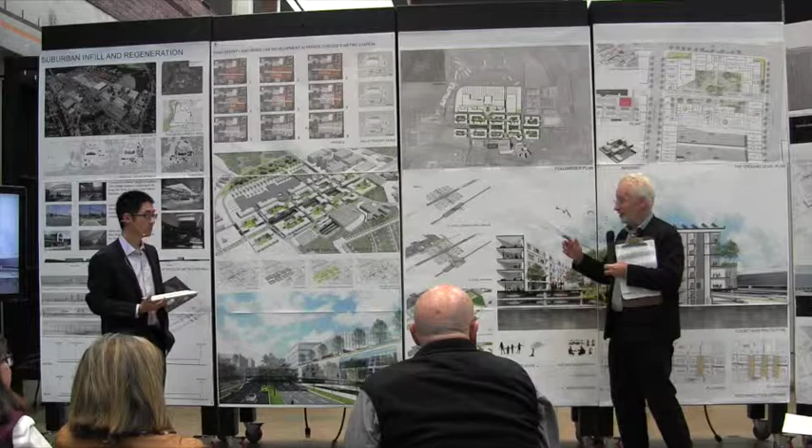And oh, by the way, there's no sloped parking here on purpose. These are connected by internal ramps so that the alternative uses of this lower deck, when cars retreat, can actually be adaptively reused more easily. You didn't touch on that, but I know you touch on it in the text of your thesis. But there were some very deliberate things here where he stayed away from some ideas and held to others.

I just want to say it's really been enjoyable for the past 2 years. I've had you at different studios and experiences. You're gonna make it a long way, and I hope you bring the lessons with you as you find your way in this profession. So thank you very much.